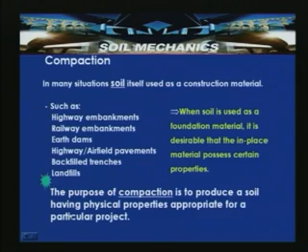The purpose of compaction is to produce a soil having physical properties appropriate for a particular project. This is very much important for us to see — the purpose of compaction is to produce a soil having physical properties appropriate for a particular project.

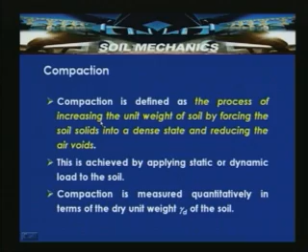Let us look into the definition of compaction. Compaction is defined as the process of increasing the unit weight of soil by forcing the soil solids into a dense state and reducing the air voids. Compaction is basically a phenomena in which the expulsion of air takes place, achieved by applying a mechanical energy and reducing air voids. This is achieved by applying static and dynamic loading to the soil depending upon the type of soil. So this densification is achieved by applying either static load or dynamic load. Compaction is measured in terms of the dry unit weight of the soil.

Compaction generally leads to the following desirable effects on soils. First and foremost is increased shear strength, that is the strength required to resist the stresses caused by external loading or due to the self weight of the soil. This means that larger loads can be applied to compacted soils since they are typically stronger — the more compacted the soil mass, the larger the loads that can be applied.

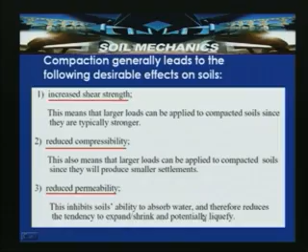Reduced permeability inhibits the soil's ability to absorb water and therefore reduces the tendency to expand, shrink and potentially liquefy. These effects — reduced permeability, reduced compressibility and increased shear strength — are generally possible by compacting the soil. That means the soil can have increased shear strength, reduced compressibility, and because of its compacted nature, reduced permeability. This reduced permeability inhibits the soil's ability to absorb water and therefore reduces the tendency to expand, shrink, or potentially liquefy. The susceptibility to liquefaction can also be minimized.

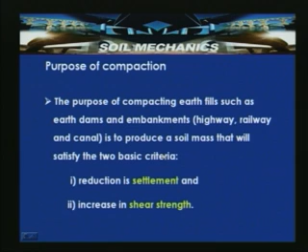To some extent we have seen the purpose of compaction: reduced compressibility, increased shear strength and reduced permeability. The purpose of compacting earth fills such as earth dams and embankments for highway, railway and canal is to produce a soil mass that will satisfy two basic functions, as discussed — reduction in settlement and increase in shear strength. So the basic purpose of compacting earth fills such as earth dams, highway embankments, railway embankments and canals is to produce a soil mass that satisfies these two basic criteria: reduction in settlement and increase in shear strength.

Let us look into the various factors, what are the purposes of compaction. Maximum shear strength occurs approximately at a minimum void ratio, that is with reduced void ratio and closer packing, maximum shear strength can be achieved. Larger air voids may lead to compaction under working loads, causing settlement of the structure during service.

Larger air voids - suppose if you have got a soil mass in an embankment with larger air voids, once it is released for traffic loading, it is susceptible to settlements and can be out of service very early.

So larger air voids may lead to compaction under working loads, causing settlement of the structure during service, and large voids if left may get filled with water, which reduces the shear strength. So these air voids, when they come across water, the ingress of water within the voids causes a decrease in shear strength. So the stability of the structure comes into the picture.

Increase in water content is also accompanied by swelling and loss of shear strength in some clays. So increase in water content is also accompanied by swelling, but depending upon the type of mineral it exhibits, as we discussed in previous lectures, and loss of shear strength in some clays.

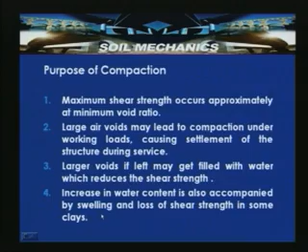What are the advantages of compaction? As we discussed, settlements can be reduced or prevented by compacting the soil. Soil strength increases because we are making the soil mass denser and denser, and stability can be improved.

This is another advantage: soil strength increases and stability can be improved, and the load carrying capacity of pavements or subgrades can also be improved, because if you compact the soil more, the load carrying capacity of the pavement subgrade improves.

Undesirable volume changes like frost action, swelling or shrinkage phenomena may be controlled. So undesirable volume changes like shrinkage, swelling or frost susceptibility can be kept under control by doing compaction.

So the following are the advantages of compaction: settlements can be reduced or prevented, soil strength increases and increases the stability of the structure, load carrying capacity of pavement subgrades can be improved, and undesirable volume changes can be kept under control.

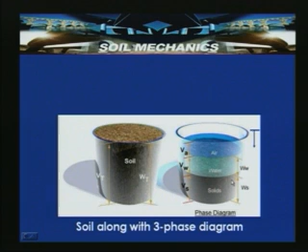Basically, compaction is nothing but expulsion of air. That means in the process of compaction, once we compact the soil, the air which is there will be shunted out by applying mechanical energy, but all the air cannot be shunted out. To some extent, there is a certain relationship between this arrangement and optimum water content that we will be discussing in the forthcoming sections of this lecture.

So here basically we said that compaction is a phenomena which is expulsion of air, and the air which is there will be shunted out with the help of mechanical energy or any suitable method like static loading or dynamic loading, depending upon the type of soil.

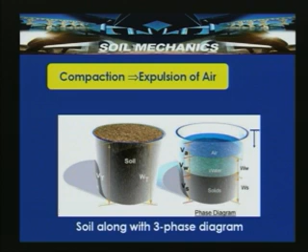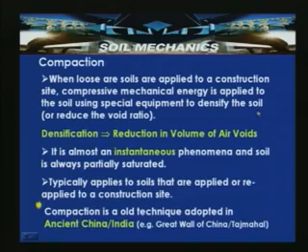When loose soils are used for a construction site, compressive mechanical energy is applied to the soil using special equipment to densify the soil, or to reduce the void ratio.

Densification is the reduction in the volume of air voids. This compaction phenomenon is almost instantaneous, and the soil always remains partially saturated. 100% saturation cannot be achieved through compaction, so in compaction soil always remains a 3-phase material.

This typically applies to soils that are applied or reapplied to a construction site. If already applied and you want to densify further, or if constructing a new structure where a new soil layer has to be compacted, this technique is helpful. Compaction is an ancient technique with roots in ancient China and India.

It was reported that compaction was earlier used in the construction of the Great Wall of China and in the foundation construction of the Taj Mahal in India. So compaction is an old technique rooted in ancient China and India.

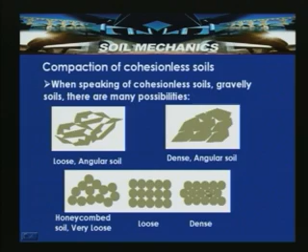So for cohesionless soil, particle shape comes into picture: it can be loose angular, loose subangular, dense angular, dense subangular, or a mixture of particles, or uniform sized particles in a loose or honeycombed state, or in a grain structure with loose and dense states.

Soils in a loose or honeycombed state are avoided or compacted, meaning subjected to densification, before being built upon, since they are prone to densification when subjected to vibratory or shock loading, such as from earthquakes or vibrating machinery.

These loose deposits of soil are always problematic, particularly sandy or fine sandy soils when saturated in a loose state. When subjected to shaking, either from blast loading or earthquakes, they undergo instantaneous densification, losing all supporting strength, and structures resting on this soil become susceptible to failure or large settlements.

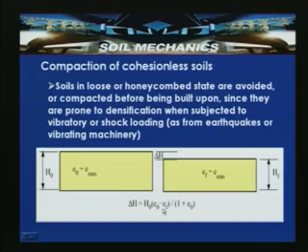At this point, delta H is the compacted thickness. Delta H by H naught, where delta H is the change in thickness, H naught is the original thickness, and HF is the final thickness. So delta H by H naught is equal to E naught minus EF. E naught minus EF: E naught is E max, the initial void ratio, and EF is the final void ratio, which in this case is E minimum.

So E naught minus EF is nothing but delta E divided by 1 plus E naught. This will directly give you, if you know these void ratios, the ability to determine the compacted thickness. Soils in loose or honeycombed state are avoided or subjected to compaction since they are prone to densification when subjected to vibratory or shock loading. So the relation expressed here is delta H by H naught equals E naught minus EF by 1 plus E naught.

When looking into the compaction behavior of a cohesionless soil, the relative looseness of a soil in its natural in situ state is determined by measuring or computing its relative density, Dr, which we studied earlier. The smaller Dr is for a given soil deposit, the more prone the soil deposit will be to densification and settlement. The particles will be rearranged into a dense state and ultimately subjected to settlement.

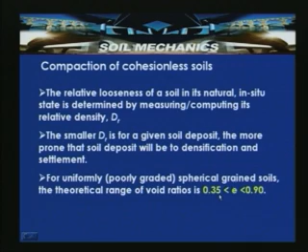For uniformly or poorly graded spherical grain soils, with identical particle sizes, the theoretical range of void ratios is between 0.35 and 0.90.

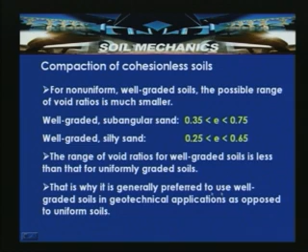For non-uniform, well graded soils, the possible range of void ratio is much smaller. Well graded with subangular sand, void ratio is 0.35 to 0.75; well graded with silty sand, 0.25 to 0.65. The range of void ratios for well graded soils is less than that for uniformly graded soil, which is why well graded soils are generally preferred in geotechnical applications as opposed to uniform soils.

That is the reason why generally we use well graded soils for better construction and in order to carry loads safely.

Looking further into compaction of soils, sandy type soils can only be compacted by vibration. Particularly cohesionless soils, sandy soils, or gravelly soils can be compacted by subjecting them to vibration using special equipment. Static load pressures produce very little compaction of loose sand or gravelly soils.

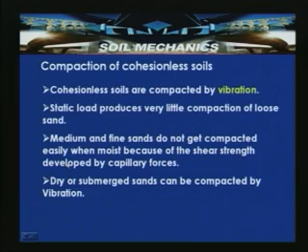Medium and fine sands do not get compacted easily when moist, because of the shear strength developed by capillary forces. Dry or submerged sands, however, can be compacted by vibration - whether the sand is in a dry state or in a submerged state, it can be compacted by subjecting it to vibration.

So what we learn from this is that it is not possible to compact gravelly or sandy soils by applying static pressures, since little compression is caused, but it can be achieved by subjecting them to shaking or vibrations. We will see this during the course of the lecture in the form of a small demonstration.

Now, having discussed the compaction of cohesionless soils, another distinctive type of soil is the fine grained soil, that is clay type of soils, where the fine grained platelet particles are predominant in the soil mass.

So, clays cannot be compacted by vibration, contrary to cohesionless or sandy soils. Shaking or vibration does not produce any volume change. A very small amount of static pressure produces a large volume decrease of the platelet particles like mica flakes, more than applying vibration to a clay mass.

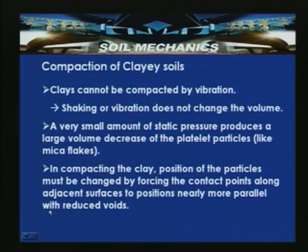So, in compacting the clay, the position of the particles must be changed by forcing the contact points along adjacent surfaces to positions nearly more parallel with reduced voids. We know these particles attach in face-to-edge or edge-to-edge orientations. These platelet particles have to be rearranged by applying pressure into almost parallel positions, so that maximum change in the volume of voids occurs.

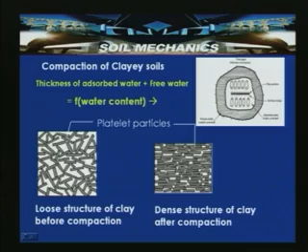When the clay has a high water content, less than saturation, a thick layer of free water of low viscosity surrounds the particles. Under this condition, only a small amount of pressure is required to force the particles to new positions. But a high degree of compaction cannot be produced with this high water content, because the thick layer of free water prevents the particles from being forced close together.

So, when the clay has a higher water content less than saturation, a thick layer of free water with low viscosity acts as a lubricating agent, and under this condition only a small amount of pressure is applied for particles to move into the dense configuration. But with higher water content, water also inhibits the particles from coming closer, as water and air try to occupy the spaces in between, which inhibits the process of densification to some extent. So a high degree of compaction cannot be produced with this high water content, because the thick layer of free water prevents the particles from being forced close together.

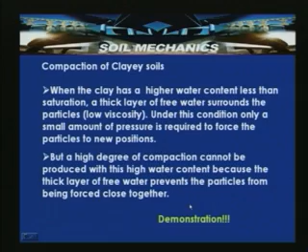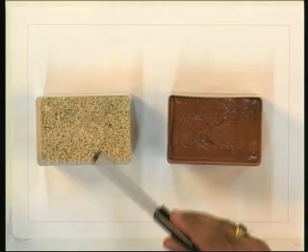Having seen the typical compaction behavior of cohesionless soils and cohesive or clay soils, let us look into a small demonstration. Here I am showing two different types of soils: one is a coarse grained sand, and the other is a very fine grained clay, shown earlier, this red clay.

Now, as we discussed, if you apply a static pressure to a dry mass of sand, very little compression can be achieved, but if you apply a set of vibrations, they will be subjected to a change in volume.

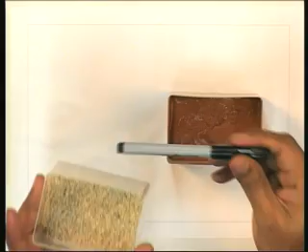So, let us try to see by subjecting them to shaking. Here in this case, this mark shows a certain state of void ratio. When this soil mass is subjected to shaking in this container for a certain period of time, you can notice the particles are able to take new positions, arranging to some extent into a denser configuration. So, in this way the delta H we are talking about is occurring here.

In this process of shaking, what we are doing is to some extent expelling the air which is in between the voids of these particles. Now you can see this has come down. That is nothing but the delta H which has been caused because of the rearrangement of these particles from a certain single grain state into a denser state than earlier.

Now let us look, contrary to this material, at a clay type of soil with a certain amount of saturation. You can see even when I subject it to shaking, there is no volume change, because this vibration or shaking is not effective in compacting or making the soil into a denser configuration. Contrary to this, such soils can be compacted easily by applying static pressure, so that the reduction in volume can be noticed. So, this is a small demonstration which tells the two distinctive behaviors of cohesionless soils and cohesive soils.

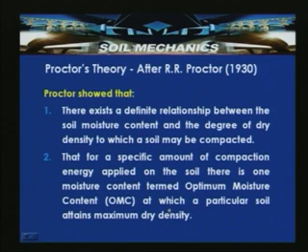One, that there is a relationship between soil moisture content and the degree of dry density to which soil may be compacted, and then he termed that there is an optimum moisture content at which a particular soil attains maximum dry density.

So, Proctor's theory, if you look into it, proposed laboratory oriented tests to determine the relationship between moisture content or water content and gamma d, the dry density. Most compaction terminology refers to gamma d as dry density; in principle, it is the dry unit weight or void ratio of a compacted soil determined in a standard manner, and to determine OMC, that is optimum moisture content for the soil.

If you list the factors which influence compaction, they are dry density or dry unit weight, compactive effort, and soil type gradation. In previous lectures we discussed the type of gradation and the presence of clay minerals. So soil type comes with gradation and presence of clay particles, along with gamma d and compactive effort.

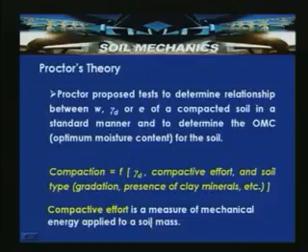Compactive effort is a measure of the mechanical energy applied to a soil mass.

Proctor proposed the test to determine the relationship between water content, gamma d, and void ratio. From that, unique values of dry density and moisture content will be determined, and then used for assessing field compaction characteristics.

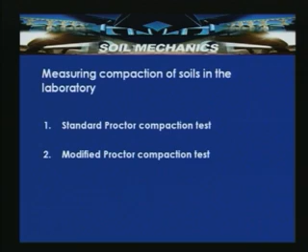For measuring the compaction of soils in the laboratory, there are two methods involved: the standard Proctor test, named after Proctor 1930, and the modified Proctor compaction test, which we will discuss in the next lecture. Both are also termed AASHTO compaction tests.

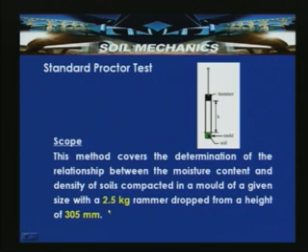This method covers the determination of the relationship between moisture content and density of soil compacted in a mold with a 2.5 kg rammer dropped from 305 mm. By dropping the rammer onto the soil mass, we are applying mechanical energy to force the particles to rearrange into a denser configuration and to expel the air in the voids.

Shortly we will see how the presence of water effectively plays a role in rearranging the particles.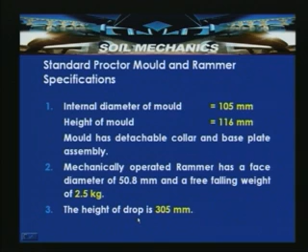The procedure: approximately 5 kg of soil is thoroughly mixed with a known water content. Initially we will not know the unique relationship a particular soil has between moisture content and dry density, so to assess this behavior, we take 5 kg of soil thoroughly mixed with known water content.

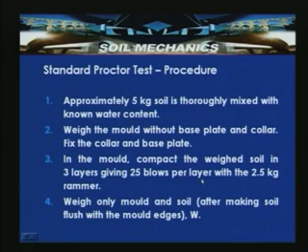Start with less water content. Weigh the mold without base plate and collar, then fix the collar and base plate. Compact the weighed soil in the mold in 3 layers, giving 25 blows per layer, totaling 75 blows with the 2.5 kg rammer.

Weigh the mold and soil after making the soil flush with the mold edges, and determine the weight W. By knowing the volume and weight, we get the bulk unit weight of the soil mass for that water content.

This procedure is repeated by adding the next water content and repeating the same steps, determining the dry density for that water content. By repeating this, we establish a relationship between water content and dry density for a given type of soil.

Remove the sample from the mold and slice it vertically to obtain a small sample for water content determination, then thoroughly break the remainder of the material. Increase the water content by 1 or 2 percentage points and repeat the procedure for each increment.

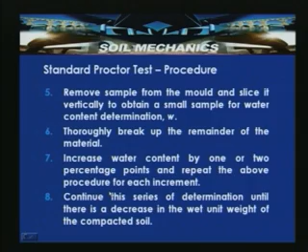Continue this series of determinations until there is a decrease in the wet unit weight of the compacted soil. The reasons why it decreases, and initially why it increases, we will discuss shortly. But this is the procedure to establish the relationship between water content and dry density in a laboratory for a given soil.

So, compactive energy E applied to soil per unit volume is given as E is equal to NNWH by V. E is the energy which is applied, expressed algebraically as NNWH by V, where N is the number of blows per layer.

In the standard Proctor test it is 25 blows per layer, with N number of layers being 3. W is the hammer weight, 2.5 kg, and the height of drop H is 305 mm, and V is the volume of the mold.

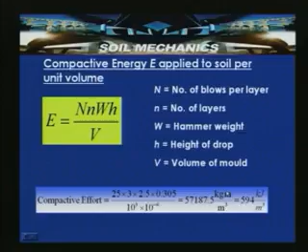So, compactive effort can be calculated using N small n WH by V, which is around 57,187 kg meter per meter cube, or 594 kilojoules per meter cube. We will be able to determine what the compactive effort is. So, the compactive effort given in the Proctor test is around 594 kilojoules per meter cube.

So, continuing with the standard Proctor test procedure, for the dry density calculations we knew the volume of the mold and the bulk density of the soil mass at a certain water content, that is W by V.

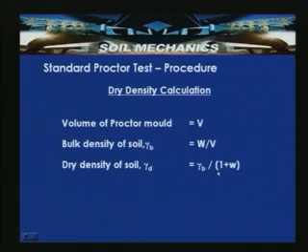So, dry density of the soil mass can be calculated using gamma D is equal to gamma bulk by 1 plus W, that is water content. With this we will be able to establish a relationship between water content and dry unit weight or dry density.

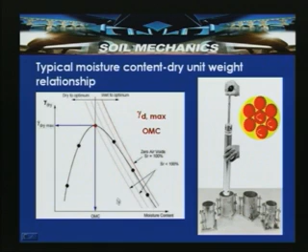In the principles of compaction and moisture density relation, we have to consider the basic how this water which is being supplied to the soil grains is influencing in rearranging into new positions.

Compaction of soils is achieved by reducing the volume of voids, predominantly the volume of air voids. It is assumed that the compaction process does not decrease the volume of solids or grains. Here the uncompacted angular soil grains are shown versus compacted soil grains, and uncompacted honeycombed uniform grains versus compacted uniform grains.

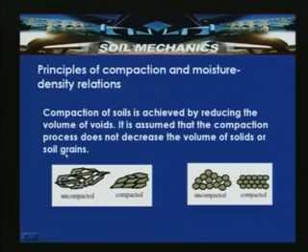Looking into the principles of compaction and the relationship between dry density, water content, and void ratio: the degree of compaction of a soil is measured by the dry unit weight of the skeleton, which correlates with the degree of packing of the soil grains.

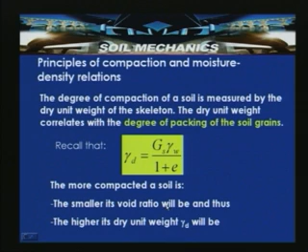Recall that gamma d equals Gs gamma w divided by 1 plus e, as derived earlier while discussing phase relationships. The more compactedness desired for the soil, the less should be the void ratio. Gs is the specific gravity of the soil solids, a constant, and gamma w is the unit weight of water. So what we look for is change in the void ratio: the smaller the void ratio, the higher the dry unit weight gamma d will be.

The relationship between water content and dry density exhibits a bell shaped curve. With increasing water content, there is an increase in density, but after attaining a certain water content where the soil exhibits maximum dry density, further increase in water content shows a decrease in dry density. This is the typical characteristic of the compaction behavior of soil, where water plays a critical role.

The reason can be attributed to water lubricating the soil grains so that they slide more easily over each other and achieve a more densely packed arrangement. Without water, lubrication will not occur, the soil remains stiff, and there will be a large amount of air voids, resulting in less dense dry density. But with replacement of air voids by water as we increase water content...

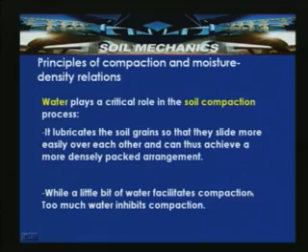Water also acts as a lubricating agent and softens the clay bonds, helping to arrange the clay particles into new and dense positions so that maximum density can be achieved. A little bit of water facilitates compaction, but too much water inhibits it. On the dry side of optimum, with less water, it helps compact the soil; with more water, it inhibits compaction.

In this lecture, we introduced the compaction behavior of soil, defined the compaction process, and understood that a standard Proctor test is one laboratory method to determine the relationship between water content and dry density of a given soil. In the next lecture, we will continue with the role of water in compaction behavior, discuss the modified Proctor test, other factors influencing compaction, and field compaction methods.